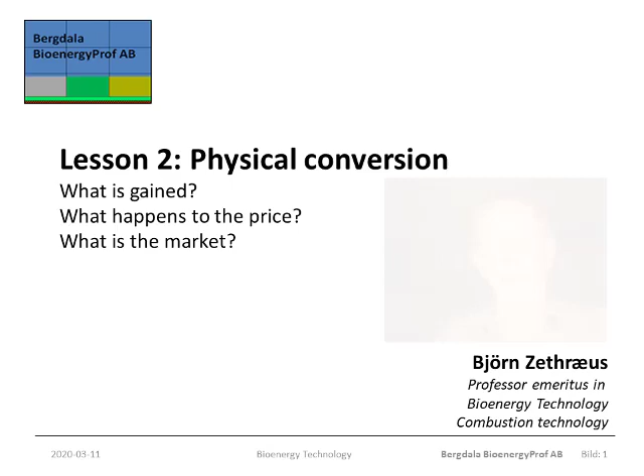There can be multiple reasons to change the physical properties of the material. A density increase, compaction, pelletisation or briquetting will increase the energy density. In case the subsequent transport is volume limited, this will improve transport economy. But if there is no transport following, or if the transport is weight limited, then this will not change the expenses.

Compaction is in itself a reduction of porosity and may improve the hydrophobic properties of the material and make it less sensitive to moisture and damp air. This may also improve its resistance to microbiological attacks. The uniformity of the particles obtained by these processes will improve the precision when it comes to feeding and dosing with the end user.

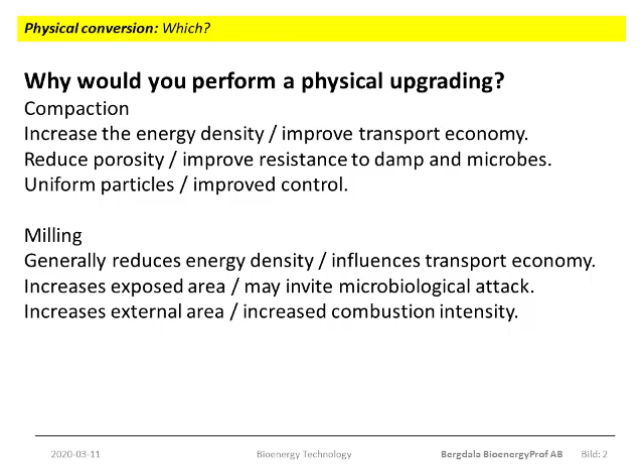Milling the material into a fine powder will generally reduce the bulk density and hence the energy density. In most cases the bulk density will become so low that transport economy is seriously affected. Milling will also increase the external particle area in square meters per kilo and may, because of this, be an invitation to fungi and bacteria to attack. For the same reason, the increase in external area can increase the combustion intensity with the end user. These two, compaction or milling, will be the main methods for physical processing.

Let us now look at compaction from a money point of view, but without any money involved. In the previous slide, I mentioned that compaction to a uniform particle size will have an influence on the control system with the end user. Not only that, with wood pellets, look at picture 414 in the BISYPLAN Handbook, you will notice that the outer surface of the pellets is blank and smooth. Compare that to the chips shown in figure 118.

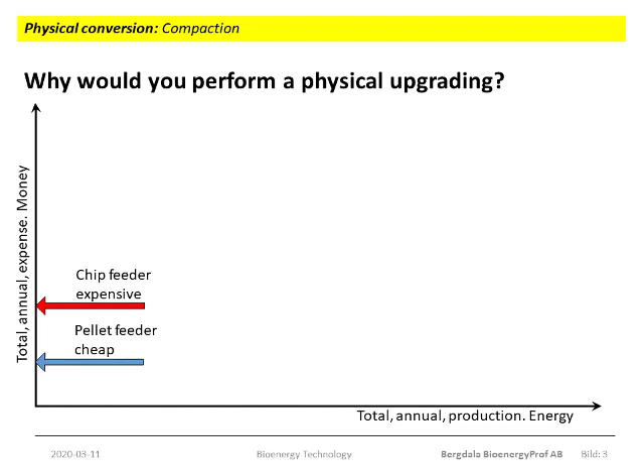So there is a natural market for wood pellets to supply smaller scale energy plants. The small scale extends from air heating stoves in household scale to summer load hot water boilers aimed for shopping centres, hospitals or alike. At least this is so in Sweden. In your country the situation may be different.

Wood briquettes are less mechanically strong than pellets and tend to break during transport, loading, reloading and feeding. Because of that, the expense for feeding and dosing equipment will be in between that for chips and that for pellets. The pressure in briquetting is much less than that for pelletizing, so the wear of the equipment is much less, and the specific costs for briquettes tend to fall between that of chips and that of pellets.

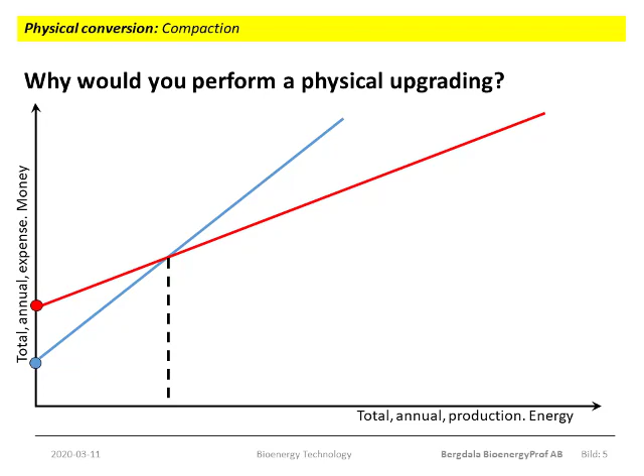The most common in Sweden is that plants using wood powder as a fuel tend to buy wood pellets, and then they have their own mills to grind the pellets into powder. Being large, these plants can negotiate a good price for the pellets. And the transport cost becomes low because it is pellets. And since the pellets are uniform, the feeding and the milling will be relatively cheap. So in these cases, the pellets are just a transport packaging.

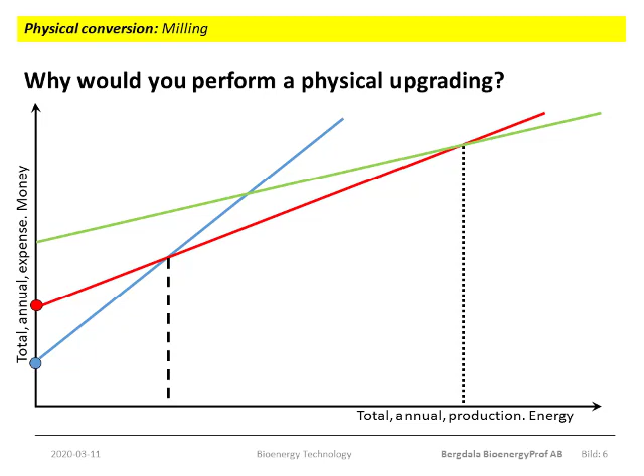But let us now look at pelletisation. In the BISYPLAN Handbook, Chapter 4.1, pelletisation is mentioned in several places. More specifically, you may want to read section 4.1.2f. You may also want to download the paper Fundamentals of Pelletisation by Henriksen and co-authors. The paper is from 2008, but I still want to recommend it because it treats not only wood pellets, but

also straw pellets. One major difference between these materials is that straw pellets, for mechanical strength, need a binder, and this is treated in the paper. There is also a summary of which European standards are valid for fuel pellets. So this paper is fairly comprehensive.

This compression is two parts. There is an elastic deformation. This is a deformation that disappears when the pressure is removed. Like if you have a balloon in your hand and you put pressure to it. When you remove the pressure, the balloon will take its original shape again. And then there is a plastic deformation. This is a deformation that remains once the pressure is removed. But the plastic deformation is not finished in the inlet section, and it has to be fixed.

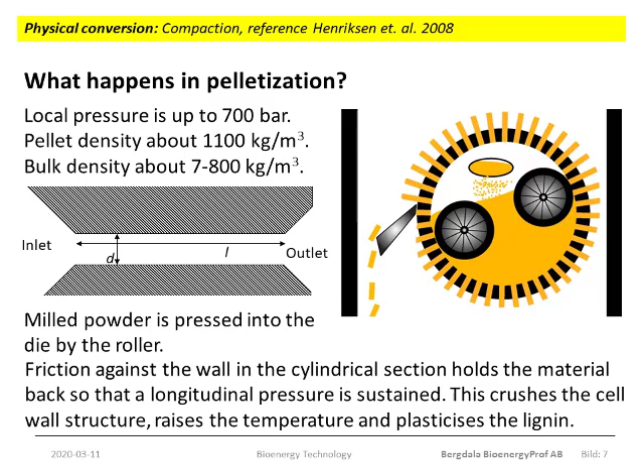The final pellets typically have a solid density of about 1100 kilos per cubic meter, and that yields a bulk density of about 700 to 800 kilos per cubic meter. The theoretical maximum for the solid density of the pellets is 1500 to 1600 kilos per cubic meter. That is the solid density of the cell wall itself. But going to that density would require even higher internal pressures than the 700 bars usually applied, and the wear of the die would become too high. So some 1100 kilos per cubic meter is a reasonable compromise.

What I said in the previous slide about lignin being the main binder is according to the most widespread theory today. However, other substances like polysaccharides and fatty acids may also play a significant role. Nevertheless, generally speaking, it is more difficult to produce durable pellets from materials that have a low lignin content. Such materials are, for example, herbaceous biomass like straw and sorted organic waste fractions.

The paper by Whittaker and Shield mentions a number of different possible binders and additives that may be used to improve the mechanical durability of pellets made from herbaceous biomass. The paper can be found at Science Direct, and you will find a link among the external links to this nugget. But also other materials, such as sorted waste fractions, are interesting for pelletisation. The fuels from such processing are generally called RDF, for refuse-derived fuels, and may contain clean fractions of waste. Such fractions will be unpredictable in composition and may pose great problems in the pelletizing process.

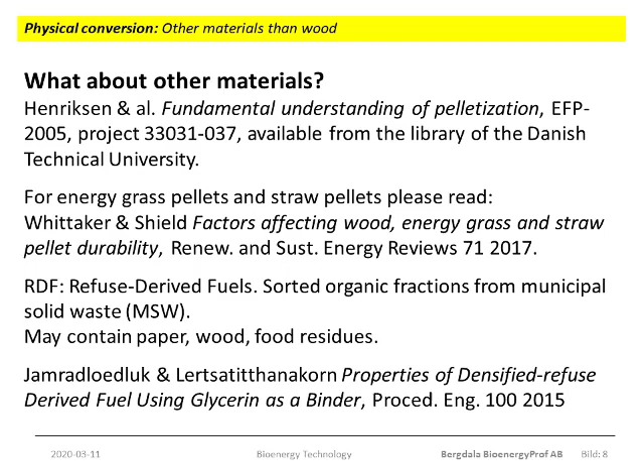One paper dealing with this problem is written by two Thai researchers. I do not dare to try pronouncing their names, but you find their names and the paper title in the slide. The paper is available from ResearchGate, and you find the link among the external links to this nugget. You will notice that the experiments referred to in the paper include plastic fractions in the RDF. This is quite common and obviously disqualifies the RDF in this study as a biofuel. But there is nothing to say that RDF could not be pure biomass. This is a question of how the waste handling system is organized, so it's a purely administrative thing.

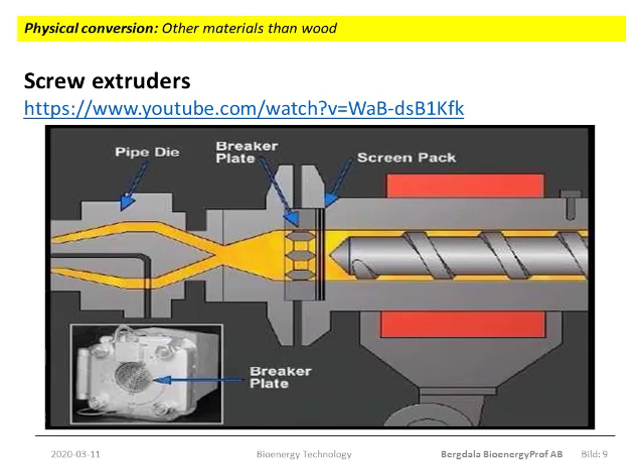In section 2.2 of the paper, it is mentioned that the briquettes had an inner diameter of 1 centimeter and an outer diameter of 5 centimeters. This indicates that the extrusion process used a screw extruder. The video illustrates the function of a screw extruder. Another common type of equipment used for briquetting is the excenter press. Screw extruders may give high pressures and compact products. Excenter presses are cheaper but cannot give as high pressures, so the products will be less durable.

Among the links to this nugget you will also find one link to a briquette film. That was recorded some years ago during a student visit, but it might give you an idea of how briquette production looks in the large scale. Now read the papers I have recommended before you go on to the homework session.